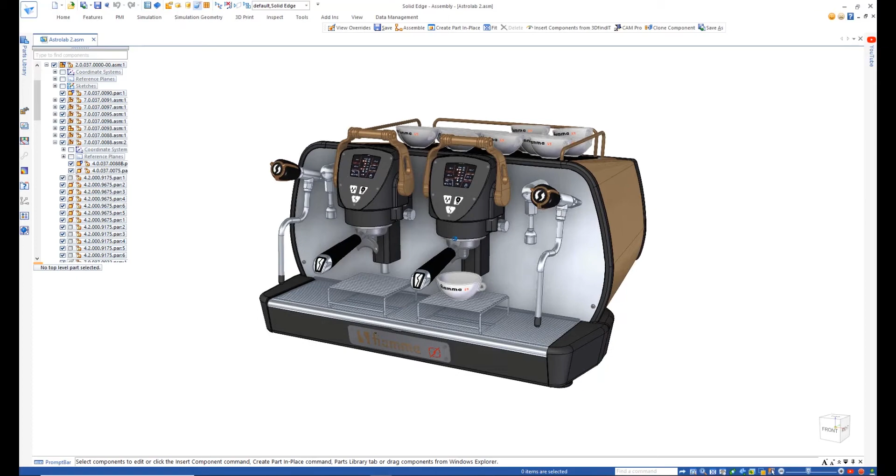Transform your manufacturing and maximize your design data with the powerful automated tools of Solid Edge's fully integrated CAD/CAM solutions. With Solid Edge CAM Pro 2.5 axis now included with every Solid Edge license, let's explore the powerful yet easy-to-use tools with this espresso machine as our example.

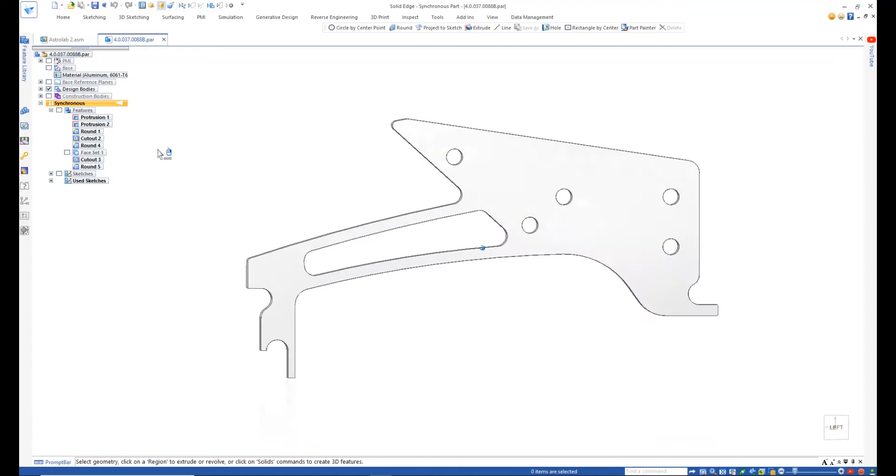We'll leverage Solid Edge CAM Pro to create the manufacturing toolpaths for the machine's rear legs. First, we'll use the Solid Edge assembly tools to create the shape to represent the stock part, and also the parts that form the fixture assembly, which include the standoff plate we see here as we add additional fixing holes from the standard database. We'll also make use of the vast supplier catalogs from 3DfindIT to get an appropriate socket head cap screw.

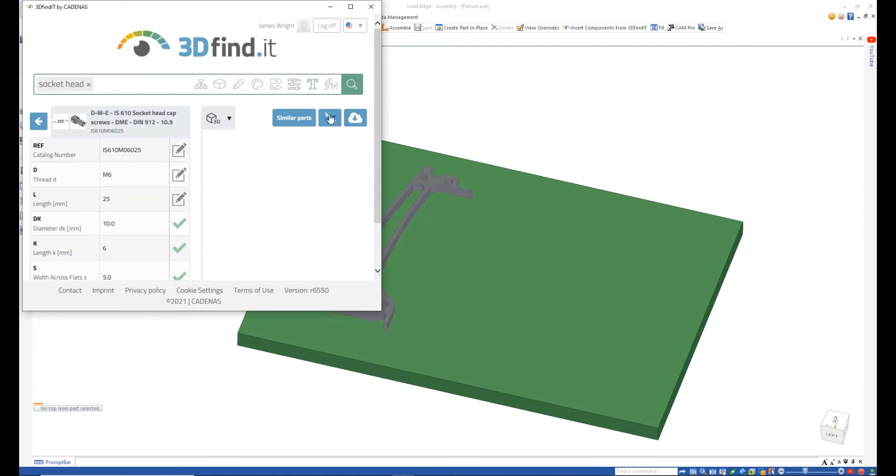You can see here Solid Edge is a great CAD for CAM tool, but also that Solid Edge CAM Pro solutions handle assemblies as well as single parts, which is very important when creating toolpaths and making sure to avoid collisions with the fixture components.

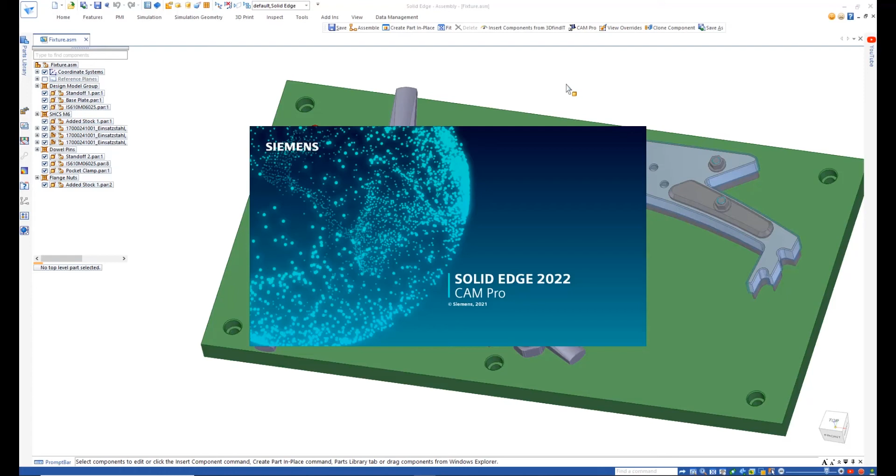We'll machine this design in two setups. Step 1 is to mill the pocket and drill the holes, and Step 2 is to machine the profile. One click sends the entire assembly to Solid Edge CAM Pro. Associativity is maintained to the complete assembly, so if there are any last-minute changes, you can quickly accept them and continue the NC programming process.

New for Solid Edge CAM Pro is the ability to create adaptive roughing toolpaths for 2.5 axis operations, included at no additional cost. These are faster than traditional toolpaths and extend the life of the cutting tools.

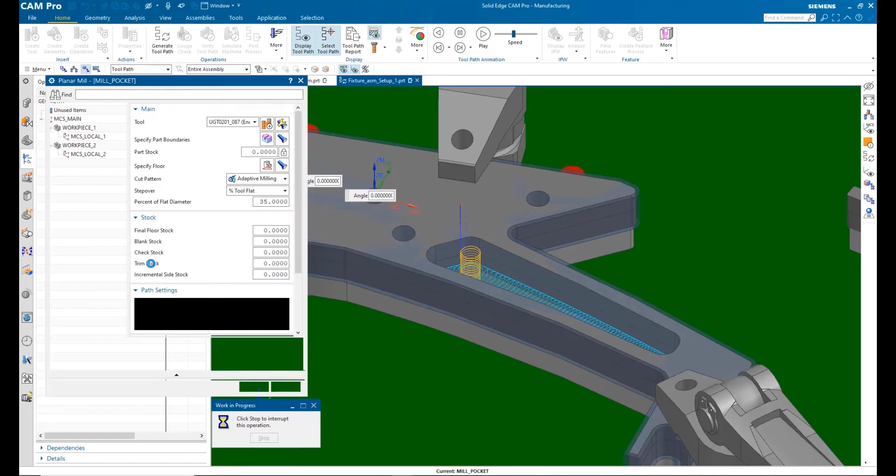Solid Edge CAM Pro also has great visual tools to build your confidence. Here we're using toolpath animation with material removal to see the cutting effect. Built-in productivity tools like right mouse button context menus allow a user to sail through the NC programming process.

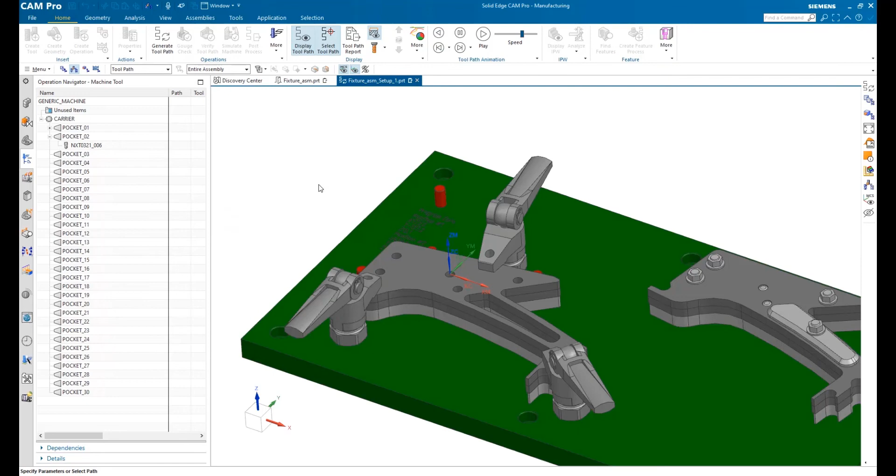Here we'll create a spot drilling operation for the 5 holes in the support. Notice the graphical pop-up hints that help us with operation selection. Graphical helps are also available in geometry selection. Each time we select a hole, we get a preview of the machining that will take place. At any point in the process, we can get visual feedback on our decisions.

Now that our CNC program is complete, let's run the whole thing through visualization before processing.

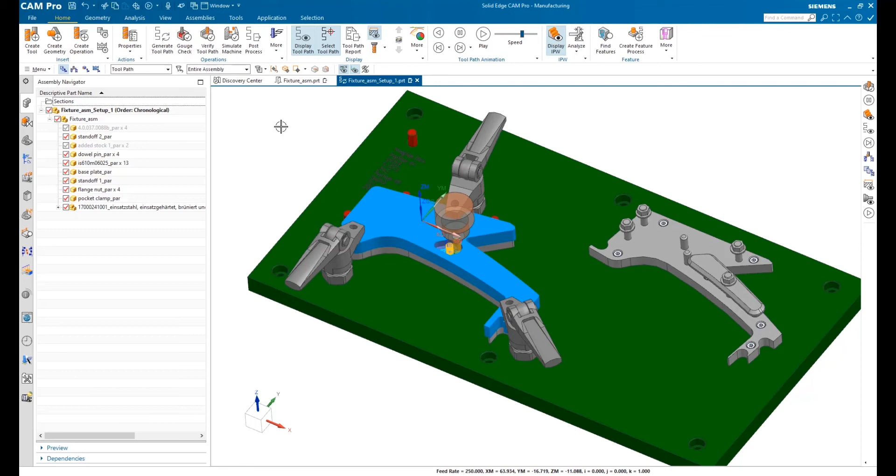Pocketing, profiling, and hole making, Solid Edge CAM Pro can do all that and much more.

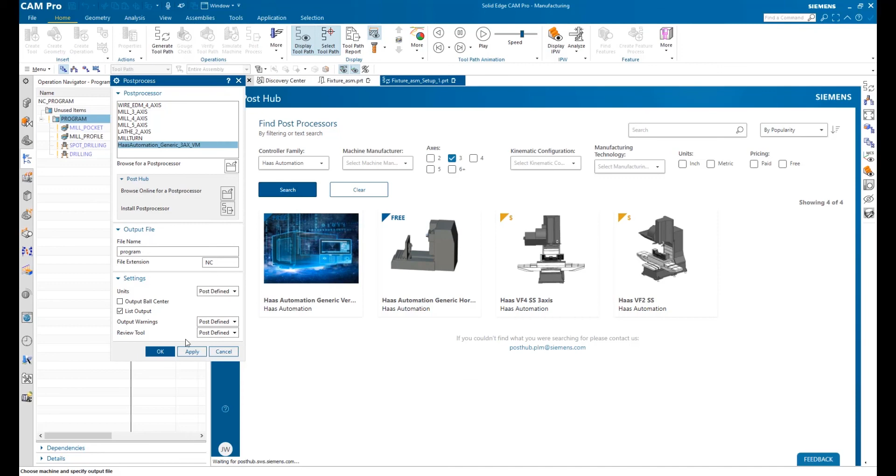No CNC job is finished until it has been post-processed for a specific machine. That's where PostHub, an online database of over 1,200 post-processors, really shines. You can filter using several different criteria to find exactly the one you need. PostHub is also constantly being updated with new posts.

Solid Edge CAM Pro 2.5 axis, now included with every Solid Edge license, allows you to transform your manufacturing and maximize your design data.